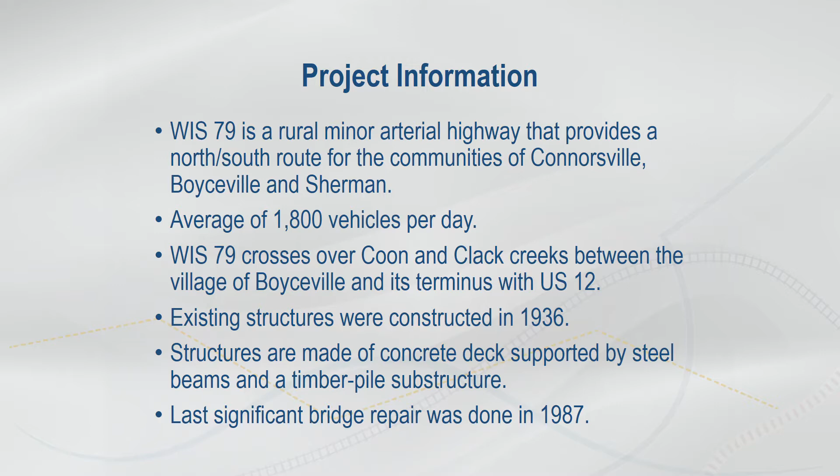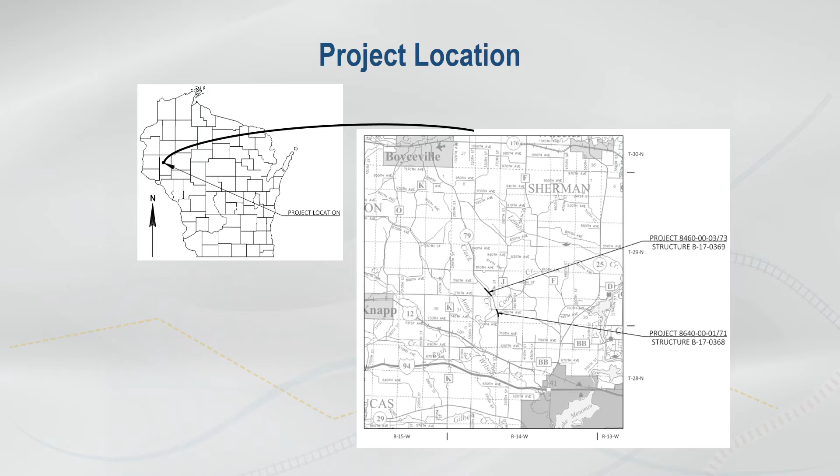The purpose of this proposed project is to address the existing bridges' failing structural elements which have reached the end of their service life. The need for this project was established through routine inspection and documentation of the structural elements of each bridge by the Wisconsin Department of Transportation Bridge Inspection staff. During these inspections, structural deficiencies were observed and recorded.

The bridge decks of both structures are showing signs of wear with visible cracks on the driving surface and spalling of the concrete soffit. Deterioration of the timber pile structural elements of both bridges was also observed. One pile on the Coon Creek Bridge was noted to have a 40% section loss due to aging and weathering of the timber material. Finally, the bridge railing for both structures no longer meets current approved crash standards. The railings are also showing signs of damage due to routine plowing maintenance done in the winter months.

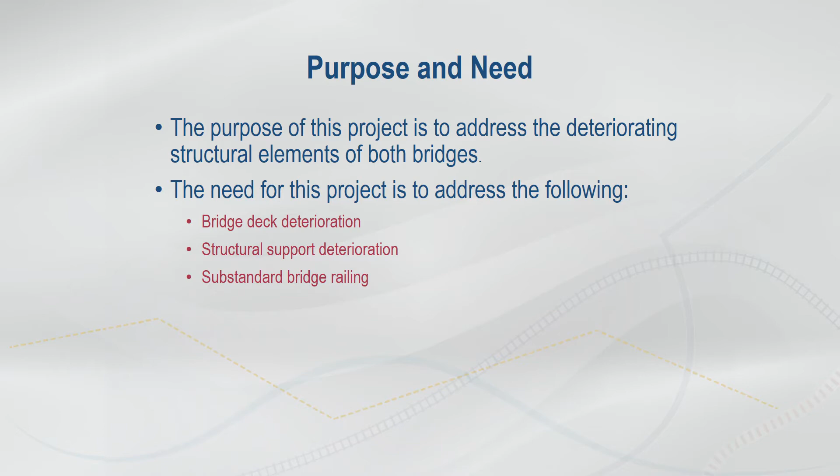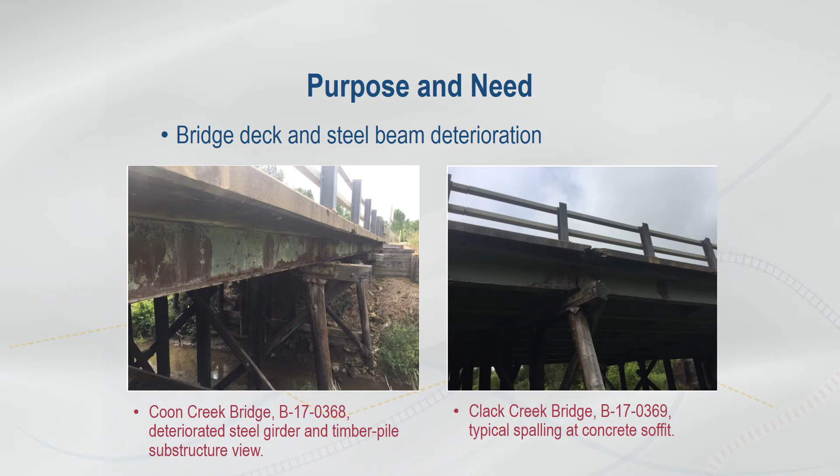The photo on the left illustrates the age condition of both the bridge deck and steel support beams, as well as the timber pile piers that make up the substructure of the Coon Creek Bridge. The photo on the right shows the Clack Creek Bridge with damage to the concrete soffit. The existing conditions of the timber pile abutments are seen here. Visible displacement of the timber materials that make up the abutment substructure have been documented at both bridges.

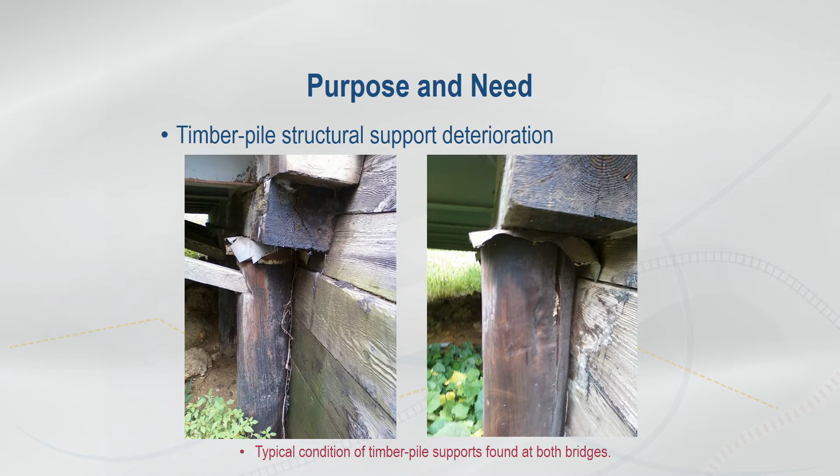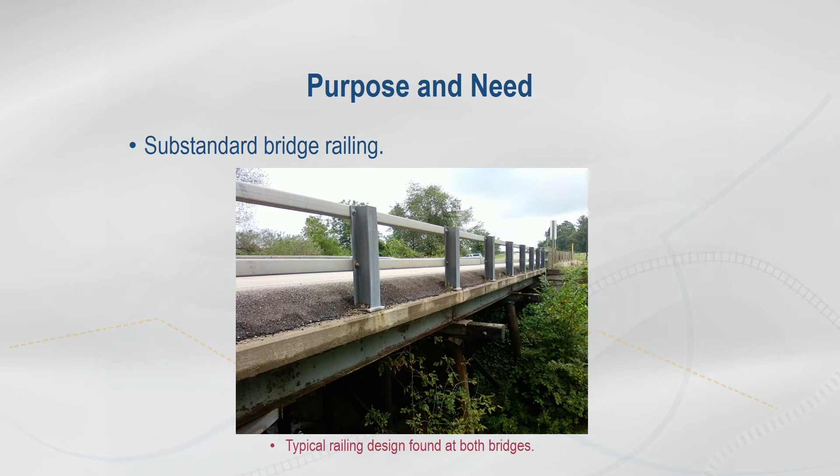The substandard bridge railing present at both structures is shown on this slide. As mentioned previously, this design does not meet the department's current standards for crashworthiness.

To meet the purpose and need of the project, the following improvements to Wisconsin 79 are proposed. Regarding the existing bridge structures, each bridge will be removed and reconstructed. The new bridge structures will consist of a concrete deck with concrete support beams and substructure. The new bridge railing will be a solid concrete wall that meets the department's current crash standards. Once constructed, the new bridge width will be wider by an estimated 4 feet.

The proposed improvements to the roadway portion of Wisconsin 79 will include new asphalt pavement surface within the construction limits, new pavement markings, signage, and new guardrail system that meets the department's currently approved designs. It should be noted that these improvements will utilize the existing horizontal location of the Wisconsin 79 centerline alignment. There are no plans to shift the centerline alignment horizontally from its existing location.

However, to match the new geometry of the bridge structures, the centerline profile of Wisconsin 79 will need to be raised. A raise in centerline elevation of approximately 1.5 feet at the Coon Creek Bridge is anticipated at this time, while the Clack Creek Bridge is expected to see a raise of 2 feet. The new bridge structures dictate a raise in profile due to the design requirements of the concrete railing and the need to maintain adequate grade across the bridge for surface water drainage.

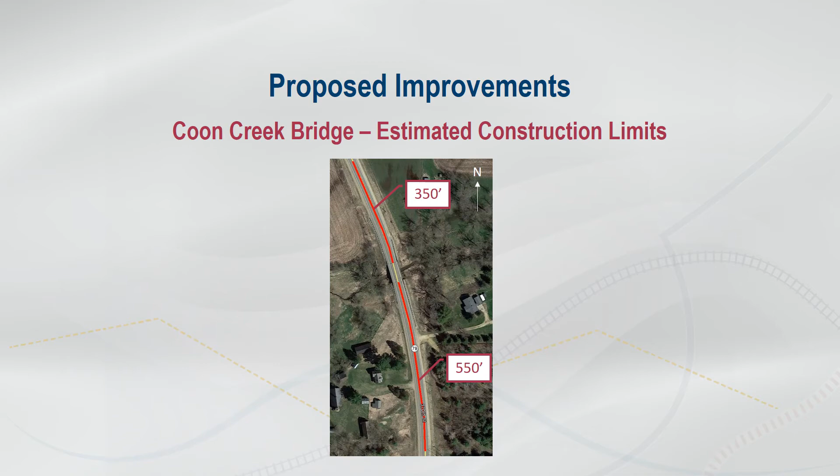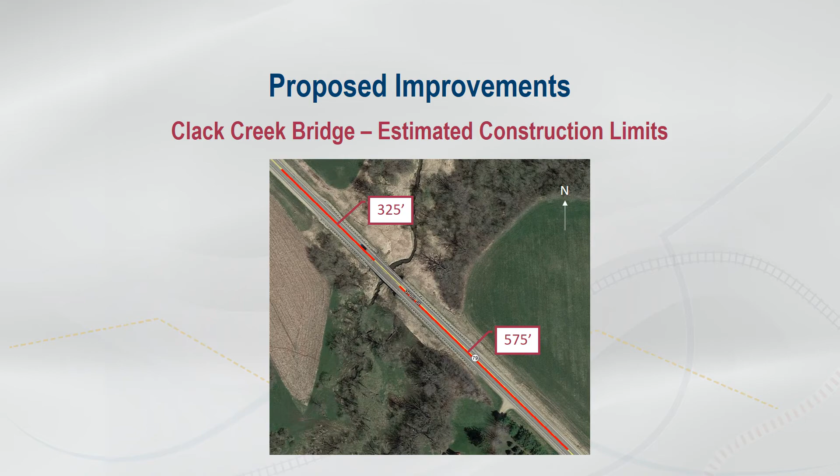The Clack Creek Bridge estimated construction limits are shown here. These limits span from approximately 325 feet north of the bridge to 575 feet south of the bridge. It should be noted that the construction limits shown for these two locations may change as design progresses. The limits shown are provided to give context on anticipated impacts to Wisconsin 79 and the surrounding land.

To construct these improvements, Wisconsin 79 will be closed to through traffic and a detour route will be put in place. This detour route will utilize US Highway 12, Wisconsin 25, and Wisconsin 170. Local residents located between these two bridges on 750th Avenue, 390th Street, and 770th Avenue will be able to access the detour route via County Trunk Highway J. It is anticipated that the closure of Wisconsin 79 to through traffic will be in place for one construction season.

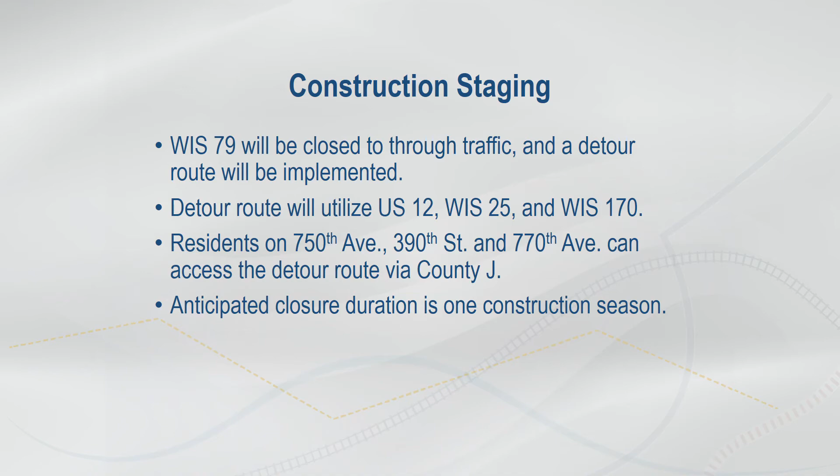Shown in greater detail here is the proposed detour route to be used during construction of these two bridges. Starting at the south terminus of the detour route, through traffic will be detoured along US Highway 12 for approximately 3 miles to the east to Wisconsin 25. From here, traffic will travel northbound on Wisconsin 25 for approximately 11 miles until reaching the intersection with Wisconsin 170 in the village of Wheeler.

From this intersection, the final stretch of the detour route runs west along Wisconsin 170 for approximately 7 miles until rejoining Wisconsin 79 in the village of Boyceville. Motorists traveling southbound on Wisconsin 79 will utilize this same route starting at the north terminus in the village of Boyceville as indicated on the map.

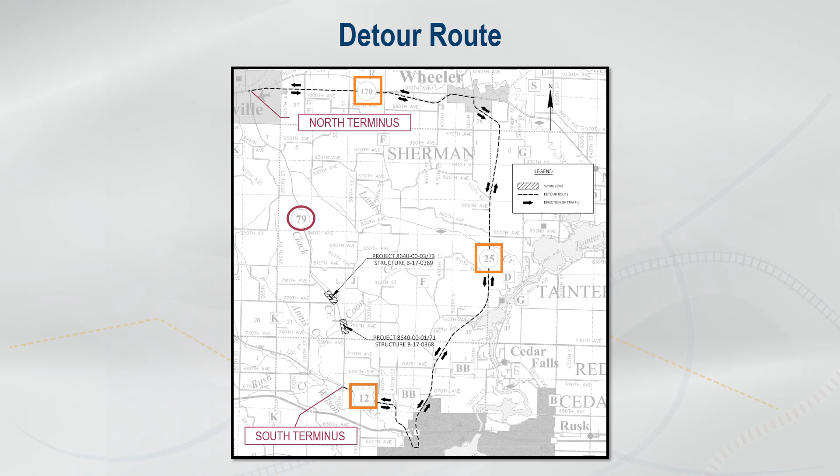No permanent closure or relocation of existing accesses on Wisconsin 79 are anticipated at this time. However, to accommodate the raised profile of Wisconsin 79 mentioned previously, some driveway accesses near these bridges will need to be raised. Throughout construction, access to adjacent properties will be maintained at all times for local residents and emergency first responder personnel.

To accommodate the raise in profile of Wisconsin 79 that accompanies the replacement of these two bridges, the Wisconsin Department of Transportation anticipates the need to purchase right-of-way. At the Coon Creek Bridge, permanent right-of-way is anticipated to be needed along the west side of Wisconsin 79. This is needed for grading and embankment construction associated with the reconstruction of the bridge and roadway approaches.

Temporary easements may also be needed throughout the project limits for tying in roadway side slopes and turf restoration. The final amount of right-of-way to be purchased is not known at this point, but the areas anticipated to be impacted are represented in the yellow highlighted regions shown on this slide.

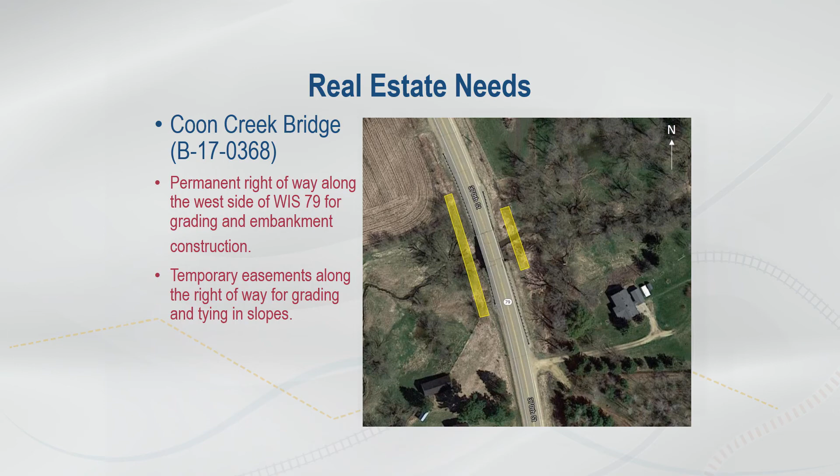Similar permanent and temporary right-of-way needs will be required at the Clack Creek Bridge as well. As mentioned previously, definitive amounts of right-of-way to be purchased are not known at this time, but estimates of the areas to be impacted at the Clack Creek Bridge are shown in yellow on this slide.

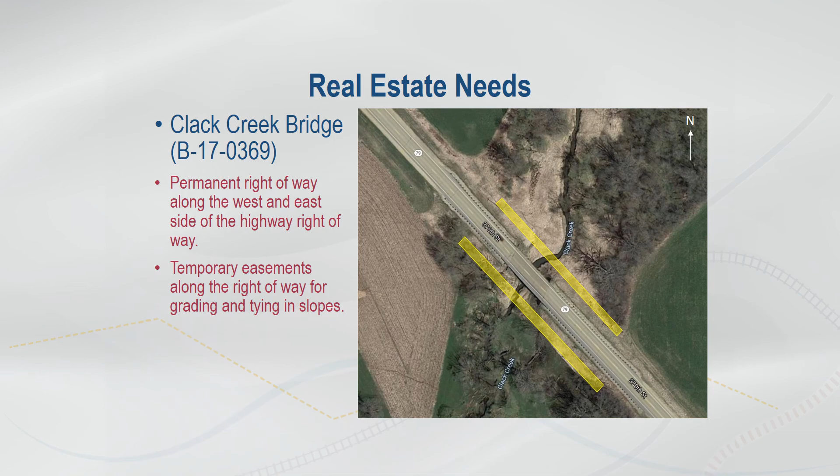The Wisconsin Department of Transportation thanks you for watching this presentation on the proposed bridge replacement project on Wisconsin 79 over the Coon and Clack Creeks in the town of Sherman in Dunn County, Wisconsin. Your comments assist the department in developing a project that will serve not only the needs of the traveling public, but the needs of the local community as well. Your input is welcome and appreciated throughout the design process.